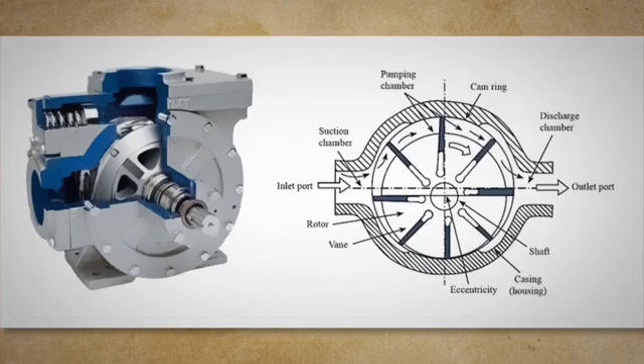The vanes are flat or slightly curved blades made of various materials, including metal, plastic, or composite materials. These vanes are typically inserted into slots in the rotor. The housing, also known as the casing or chamber, is a cylindrical structure that encloses the rotor and vanes. It contains inlet and outlet ports for fluid entry and exit.

Inlet and outlet ports are openings on the housing that allow fluid to enter and exit the pump. These ports are equipped with valves or check mechanisms to control the flow of fluid. Some vane pumps feature a cam ring or ring sleeve, which helps maintain contact between the vanes and the housing as the rotor rotates. This design enhances efficiency and reduces wear.

Vanes can be made from a variety of materials, each with its own advantages and limitations. Metal vanes are commonly made from materials like steel or aluminum. Metal vanes are durable and suitable for handling a wide range of fluids, including those with high viscosity and temperature. Plastic vanes are lightweight and corrosion resistant. They are often used for applications involving chemicals that may corrode metal components.

Composite vanes are a combination of materials, such as carbon fiber or graphite, embedded in a polymer matrix. They offer a balance of strength and corrosion resistance. The housing of a vane pump is typically made of cast iron or aluminum alloy. It is designed to withstand the pressure generated during operation and maintain the integrity of the pump.

The housing contains inlet and outlet ports, which are strategically positioned to facilitate the flow of fluid. Inlet and outlet ports often feature valves or check mechanisms to ensure one-way flow. These valves prevent backflow and maintain the direction of fluid movement, enhancing the pump's efficiency and performance.

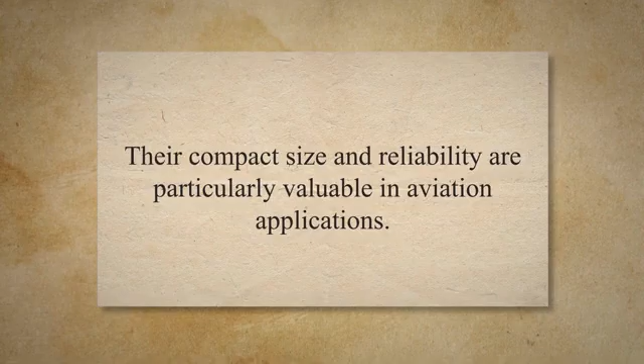Farm equipment, such as tractors and combine harvesters, often rely on vane pumps for various hydraulic functions, including lifting and steering mechanisms. Vane pumps contribute to the efficiency and productivity of agricultural operations. Vane pumps are suitable for handling a wide range of chemicals and fluids, making them essential in the chemical and process industries. They are used for transferring, mixing, and processing various substances.

In the food processing industry, vane pumps are employed for tasks such as transferring liquids, filling containers, and maintaining consistent flow rates in food production lines. Their ability to handle food-grade materials safely is a significant advantage.

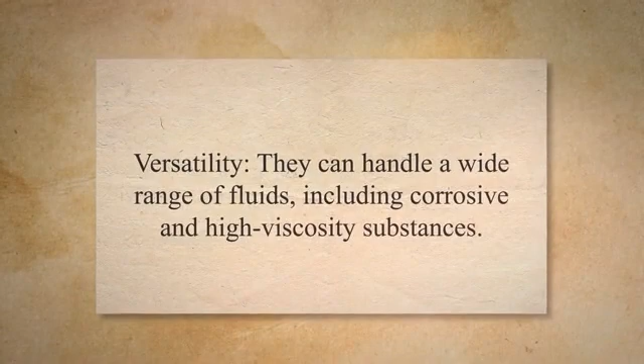Precise control. Vane pumps offer precise control over flow and pressure, making them suitable for applications where accuracy is critical. Reliability. Vane pumps are known for their reliability and long service life when properly maintained. Versatility. They can handle a wide range of fluids, including corrosive and high-viscosity substances.

Quiet operation. Vane pumps operate with minimal noise and vibration, improving workplace comfort. Efficiency. Their low internal leakage and constant displacement contribute to high overall efficiency. Ease of maintenance. Vane pumps have a simple design, making maintenance and repairs relatively straightforward.

Limited pressure range. Vane pumps may not be suitable for high-pressure applications when compared to piston pumps. Wear and tear. Over time, the vanes and housing can experience wear, affecting pump performance.

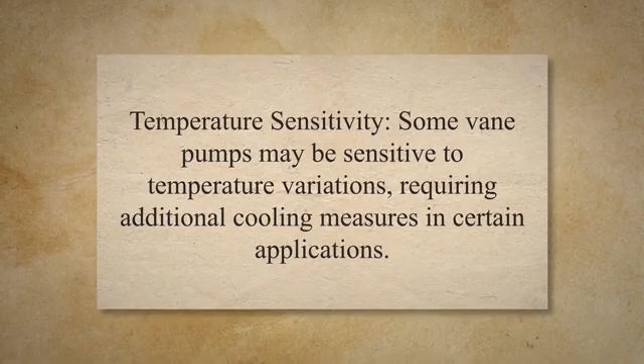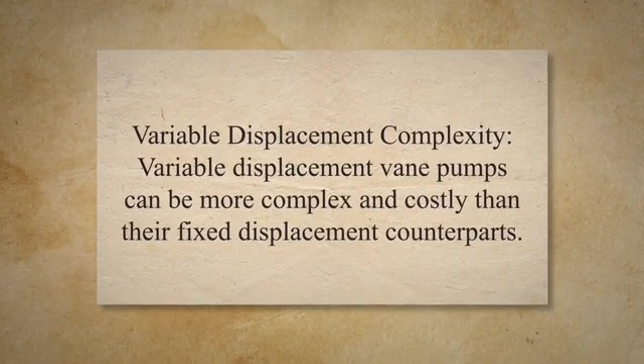Temperature sensitivity. Some vane pumps may be sensitive to temperature variations, requiring additional cooling measures in certain applications. Variable displacement complexity. Variable displacement vane pumps can be more complex and costly than their fixed displacement counterparts.

To ensure the longevity and reliability of vane pumps, regular maintenance is essential. Here are some maintenance tips. Lubrication. Properly lubricate the vanes and rotor to reduce friction and wear. Inspect vanes. Periodically inspect the vanes for signs of wear or damage and replace them as needed.

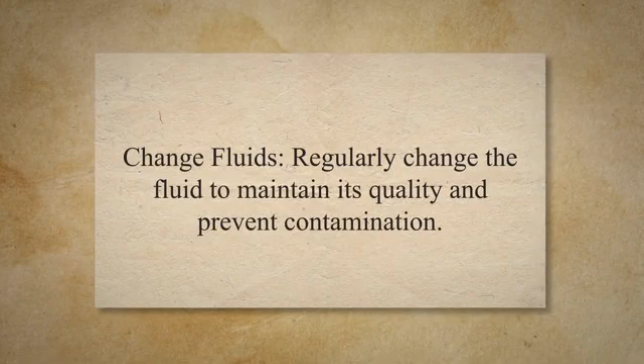Check seals. Ensure that seals and gaskets are in good condition to prevent leaks. Monitor temperature. Keep an eye on the operating temperature and implement cooling measures if necessary. Change fluids. Regularly change the fluid to maintain its quality and prevent contamination.

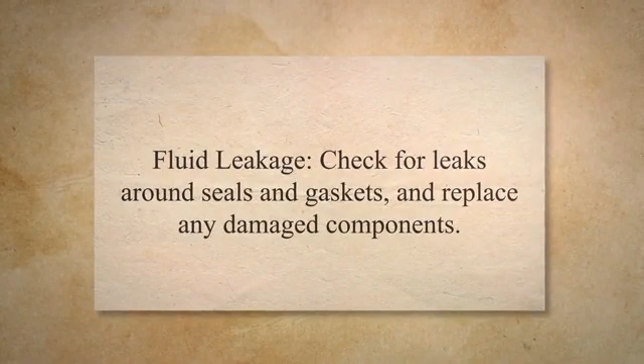Reduced flow rate. If the pump is delivering less fluid than expected, it may be due to worn vanes. Inspect and replace them if necessary. Fluid leakage. Check for leaks around seals and gaskets, and replace any damaged components.

Excessive noise or vibration. Excessive noise or vibration can be caused by misalignment or worn components. Ensure proper alignment and replace any worn parts. Overheating. Overheating can occur due to excessive friction or insufficient cooling. Address the root cause, whether it's worn vanes, misalignment, or inadequate cooling.

Vane pumps and gear pumps are both positive displacement pumps, but they have distinct differences. Vane pumps have a higher efficiency compared to gear pumps. They offer better suction capabilities, making them suitable for applications with a vacuum or low inlet pressure. Vane pumps operate more quietly and with less vibration. Vane pumps can handle a wider range of fluid viscosities and are less sensitive to fluid properties.

Gear pumps are simpler in design and easier to manufacture. They are more cost-effective for low-pressure applications. Gear pumps are suitable for higher pressure applications compared to vane pumps. Gear pumps may have limited capabilities with highly viscous fluids.

Another common comparison in the realm of positive displacement pumps is between vane pumps and piston pumps. Vane pumps are generally less expensive and have lower maintenance costs. They are suitable for medium pressure applications. Vane pumps offer good efficiency and control but may not match the precision of piston pumps in some applications.

Piston pumps are capable of higher pressures and are often used in heavy-duty applications. They provide precise control over flow and pressure. Piston pumps are more complex and expensive to manufacture and maintain compared to vane pumps.

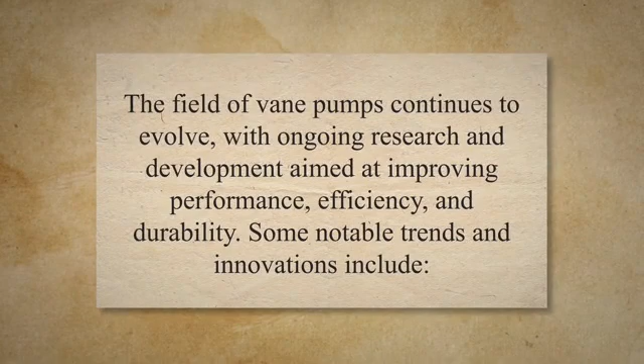The field of vane pumps continues to evolve, with ongoing research and development aimed at improving performance, efficiency, and durability. Some notable trends and innovations include materials advancements: continued development of advanced materials for vanes and housing to enhance wear resistance and reduce friction. Variable displacement technologies: further refinement of variable displacement vane pump technologies to provide greater control and

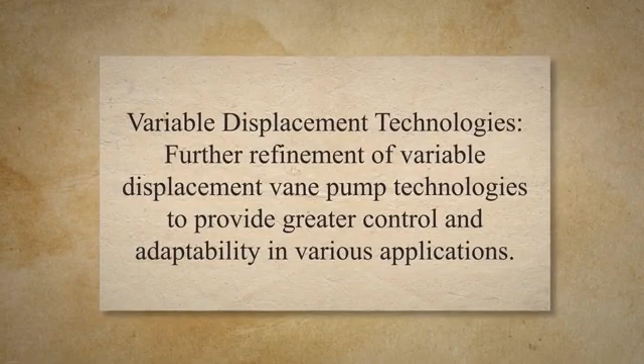adaptability in various applications. Smart pumping systems: integration of sensors and IoT technologies to monitor pump performance in real time and enable predictive maintenance. Environmental considerations: development of eco-friendly vane pump designs that minimize environmental impact through reduced fluid consumption

and energy efficiency. Vane pumps are a versatile and reliable class of positive displacement pumps that have found widespread use in a diverse range of industries. Their positive displacement nature, precise control over flow and pressure, and ability to handle various fluids make them invaluable in applications where consistency and efficiency are paramount.

Understanding the design, working principles, types, advantages, disadvantages, and maintenance requirements of vane pumps is essential for anyone involved in the fields of engineering, manufacturing, or fluid dynamics. As technology continues to advance, vane pumps are likely to see further refinements and innovations, ensuring their continued relevance in the industrial and hydraulic landscapes.